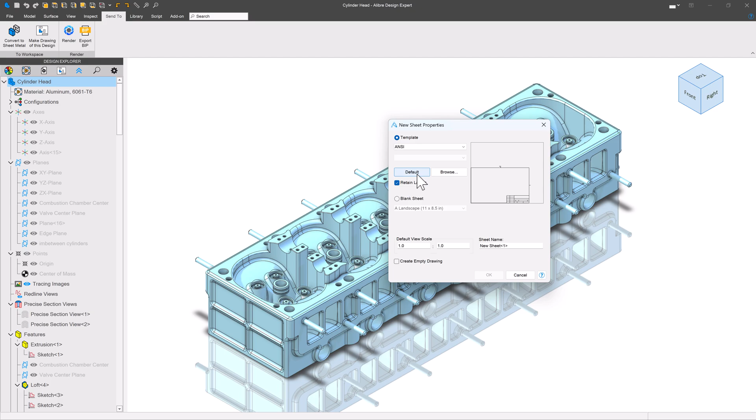Let's go. Here's my part in Alibre, and I would sure love to be able to show its weight on my drawing. So the first step is to make sure your part is saved and get this on a drawing. Choose whatever template you'd like. I'll go ahead and go with, say, ANSI size B. And I'll insert my views.

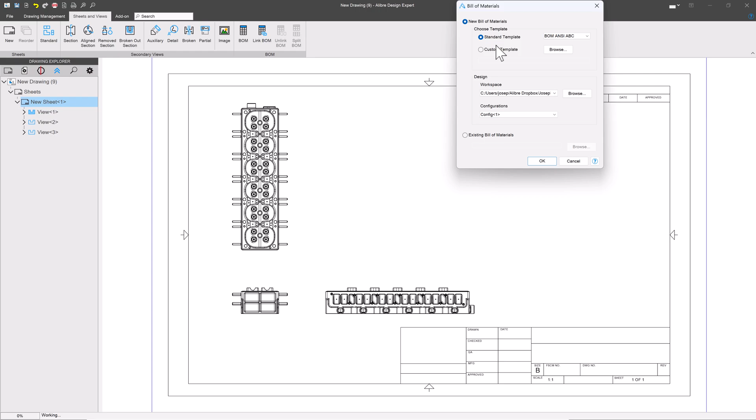Now from here, we have one individual single part. There's not really any reason to have a bill of materials. However, we can use the bill of materials for another reason. So I'll click on Bill of Materials, and then I'll choose a standard template, unless you have some custom template that you like. And from here, I'll double click on my Bill of Materials to edit, and I'll go with Add Column.

But instead of add column, I'm actually going to delete all of the columns that I have over here. Scroll to the bottom and add simply one column called weight. I'll click the plus sign to put weight in. And now my bill of materials is delivering my weight as 9.6 kilograms. So I can exit out of that, and I can stick my bill of materials wherever I would like for it to report weight. Now let's take a look at how this works.

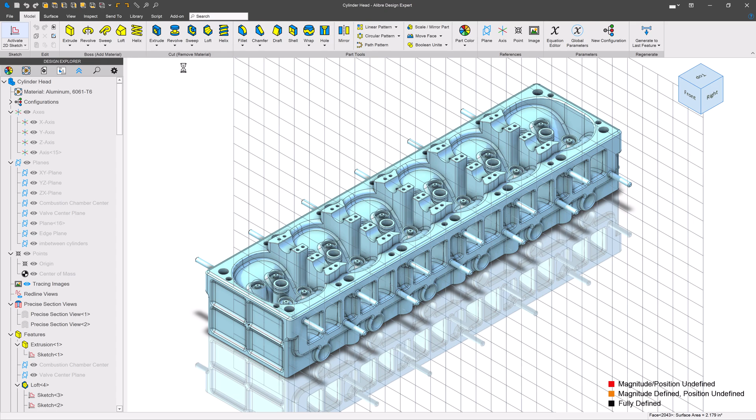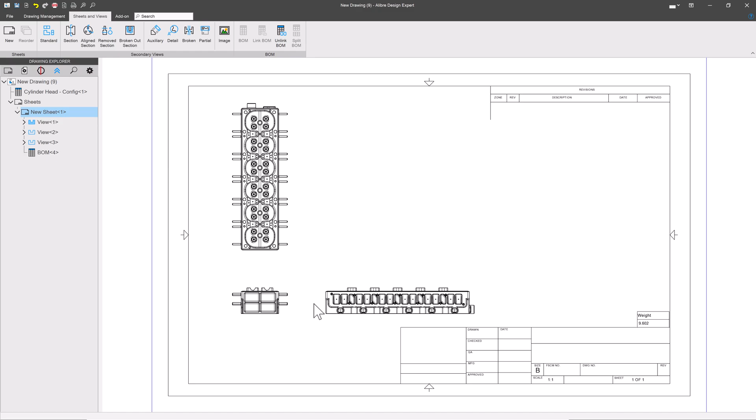I'll go ahead and edit my 3D model, and I'll add some weight by sketching out something to extrude on this face. I'll make a circle right on the origin here. We'll extrude. Now I'll head on back to my drawing. We'll save and close. And you'll see that this doesn't show up on my drawing, right? There's no extrude here, and the weight is still the same.

So we'll make sure that our drawing's up to date by reprojecting the views. And of course, I should save my drawing first. And once we're all saved, we'll reproject. There you can see the extrude that we just added in, and our weight is increased to 10.9 kilograms. So this is how we can get an updating drawing, exactly how we'd want with updating weight.

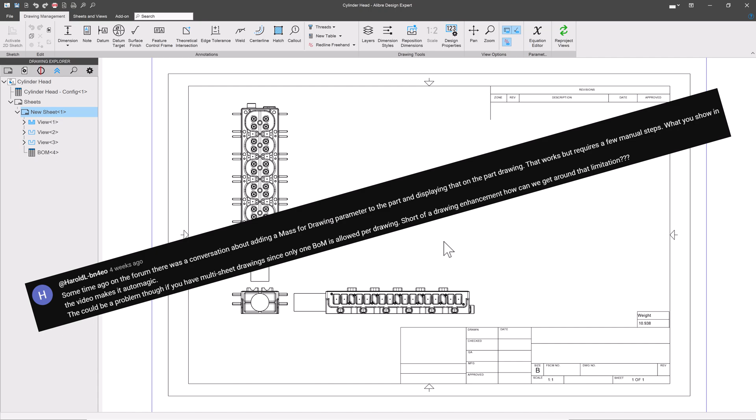But I received a few other questions. What can we do if we want to put weight that updates on multiple sheets? And what are some ways that we can handle an assembly? Well, let's talk about that by talking about another strategy to get weight on our drawings. First, I'm going to delete my views. There we are. And now I have basically a blank template.

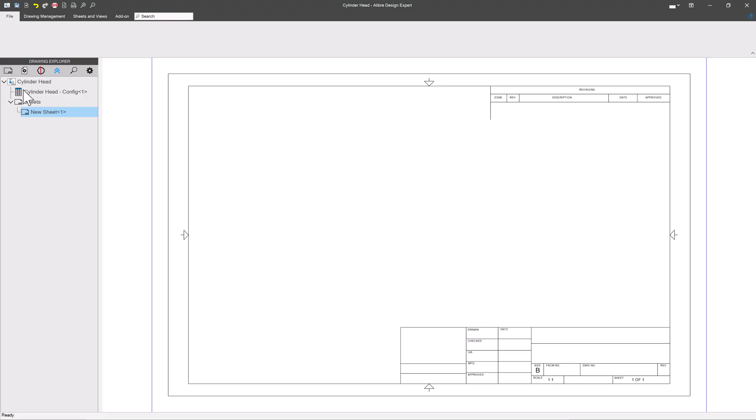And I want to save as such. So I'm going to do a save as. I'm going to save this so that I can use it as a template. So now I have this drawing template weight file set up, right? And I'm going to use this as a template. And I want to make a property. So I'm going to open up a blank part now. And we'll go to File and Manage Properties.

You see, I have a property called Mass for Drawing, exactly like this. So type this out exactly as it is, Mass for Drawing, and then click OK. And you'll have a custom property come up called Mass for Drawing, and it needs to be called exactly this.

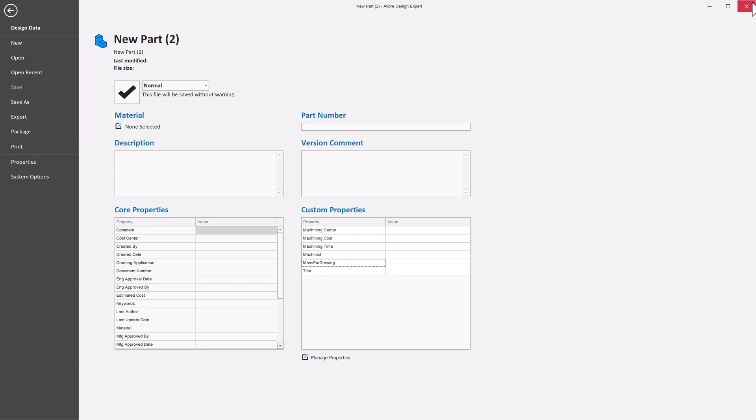So once Mass for Drawing is set up, we'll head back to our drawing here, and we'll go with starting a sketch on our sheet and inserting a field, a text field. And we want this field to have a property value, and for the value, we're going to have it be our Mass for Drawing right here under custom properties.

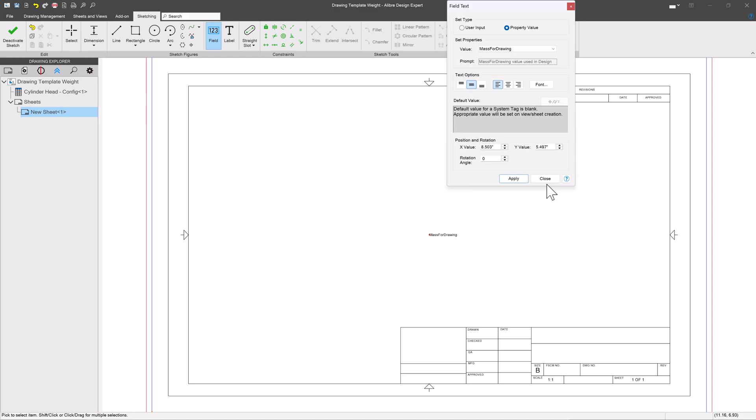Now ANSI templates don't explicitly mark this box, but it's mostly used for weight. So I'm going to put my weight right there in its little box. And I'm going to save my template. So I have this blank property that is called mass for drawing. And now we can go to a scripting solution.

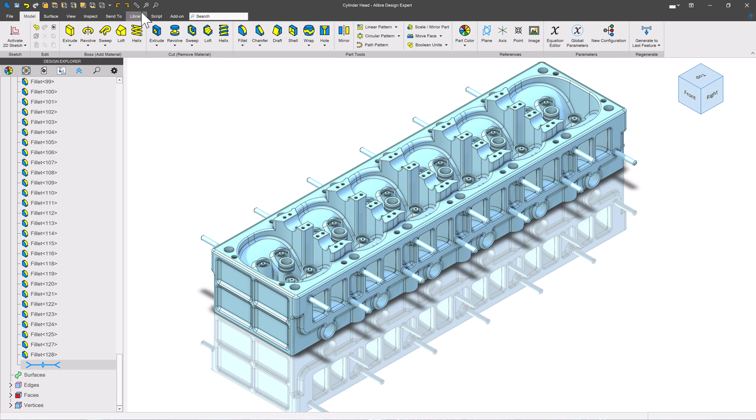So now that we're back to our part, we need a strategy to get a value into that custom property. And I think a script is the best way to go for pro and expert users. So we're going to go to script over here and launch our Python console. I'm going to go with new, and I can paste in a script. I'm going to put the script here in the description of this video so you can use it too. And I'll go ahead and run.

You'll see that we go to our console and our carets will show up here. So we're done running the script and it looks like there's no errors. So I'm going to go over to my file and I can see that mass for drawing is now populated with the mass of 9.6 kilograms like we've seen before.

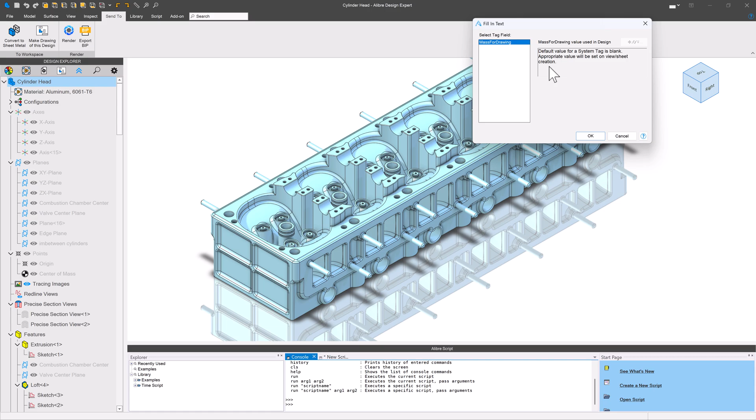So with that being said, let's go to save the part, send to, and we'll make a drawing. But this time we'll make sure that we browse and we pull up the template that we want. And that's the template that I saved it as, so I'm going to say OK. You can see that our mass for drawing is set to be automatically put in. So say OK to that. All right. Now we can see that down here our property has updated to 9.6 kilograms, exactly what we wanted.

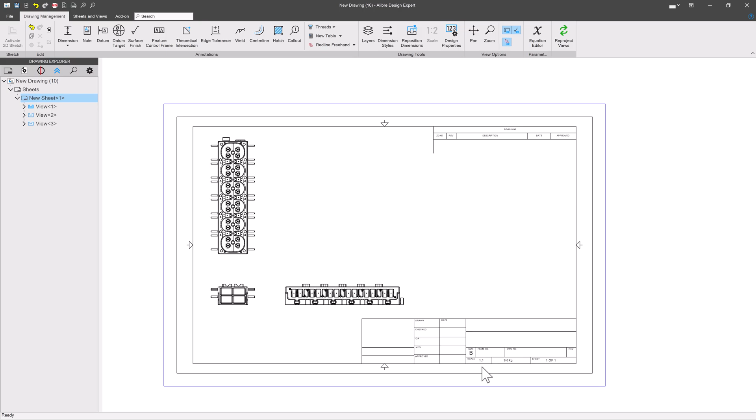So these are two ways that you can get a weight on your drawing. Now it is important to say that when a change is made, the script needs to be rerun so the correct property value gets added in. Now it can be a pain to try to paste that script into the console every single time. So let's make some changes here.

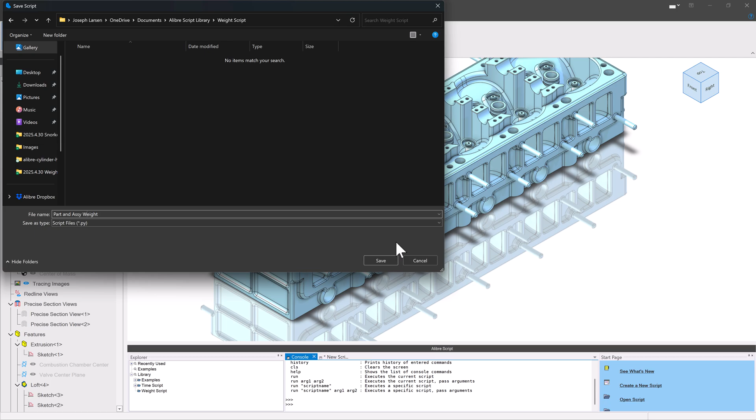Under Library, I can open Library in Windows Explorer, and there's my script library, right? So I'll go to Script and Save As, and it will save my new script with whatever I'd like. So I'll go ahead and enter in the path to my library, and then I'll make a new folder called Weight Script. Or you can organize your scripts however you see best. And I'll say part and assembly weight. And now I can see my weight script shows up. And I can just double click to add this.

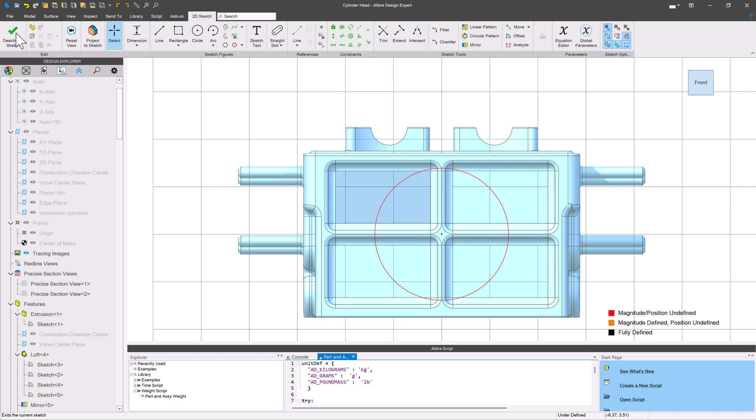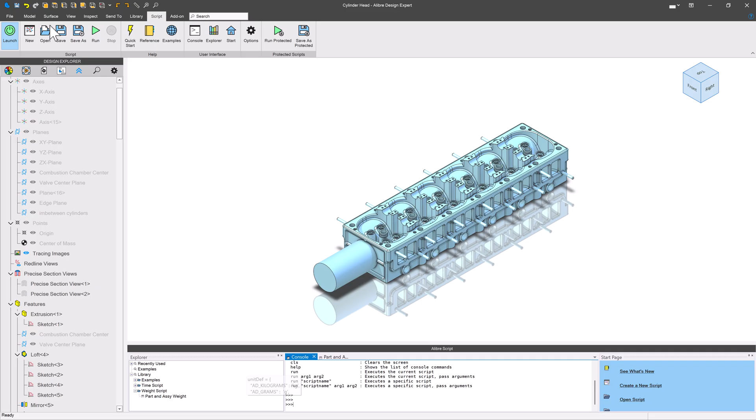So if I once again go to my model and create a sketch on my cylinder head's face. And so I'll add a circle right on the origin here. And once again, do an extrude just to change our weight. And then we'll go to our scripts and double click on part and assembly weight. And then we'll go up to here to scripts and make sure that we run it. So after running, we can see that we have 10.93 kilograms, which is our new weight.

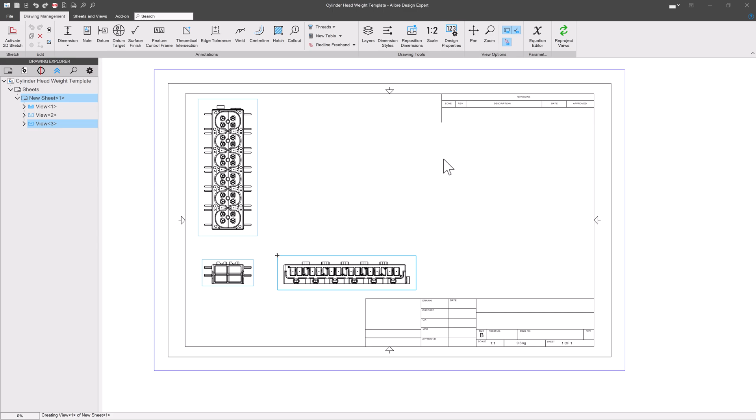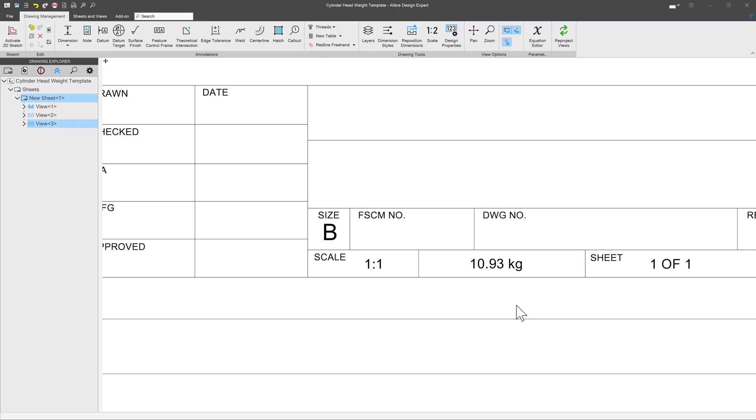I'll go ahead and save my changes. And now when I go ahead and update everything, apparently I have to save. I'll reproject my views now. And there's our 10.93 kilogram update. So we have updating weight, and of course you can make your subsequent title block sheets all have this weight, so you can have weight on every single one of your sheets, and it updates for parts, no problem.

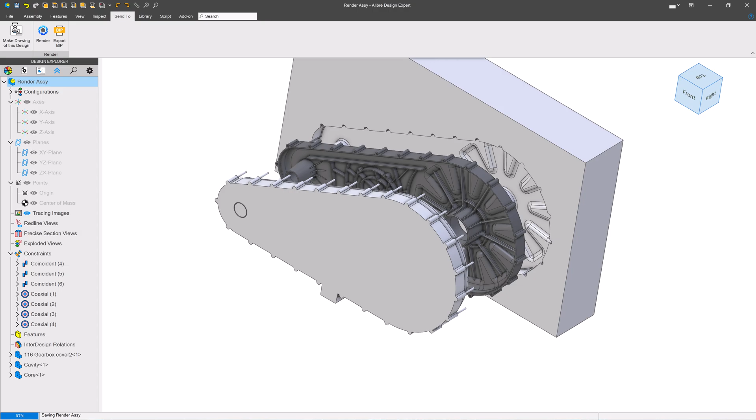But what about assemblies? Let's take a look at those. So here is an assembly, right? We want to send this to a drawing. This is for injection mold tooling, right? So our parts fit right in, and you can get injection molds that way. Let's send this to this drawing, and I'll go ahead and save it first because I moved those parts. And we're going to say, oh yeah, let's use that custom template.

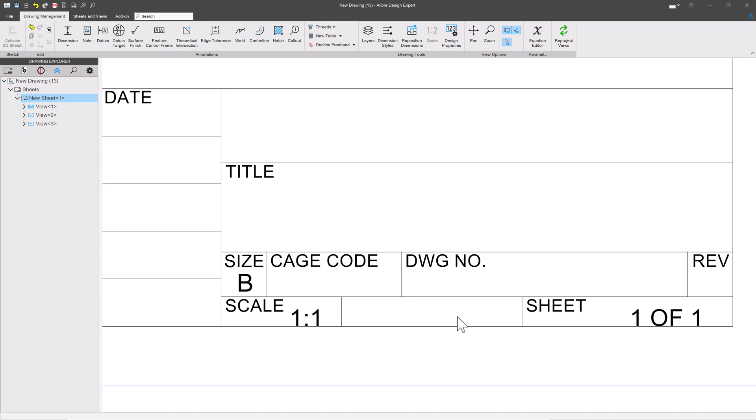Alright, here we go. And as you can see, we have no value down here because we haven't run our script yet. But let's say that we want to get our weights using our bill of materials. So let's go ahead and go with Sheets and Views, Bill of Materials, and I'm going to say OK to that. Because we're in an assembly, maybe I want to keep all my columns this time, and I'll add weight.

Once I close this, I can see that every component has its weight listed. Now there's one thing that we can do if we want the weight of our entire assembly. That's quick and easy, but I don't recommend it, and I'll show you why. First off, I can highlight this and say column, show summation row, and this adds up everything, right? So if I want to know the total quantity of parts that I am putting in my assembly, I can say column, show summation row, and it tells me I have a total assembly of 3 parts.

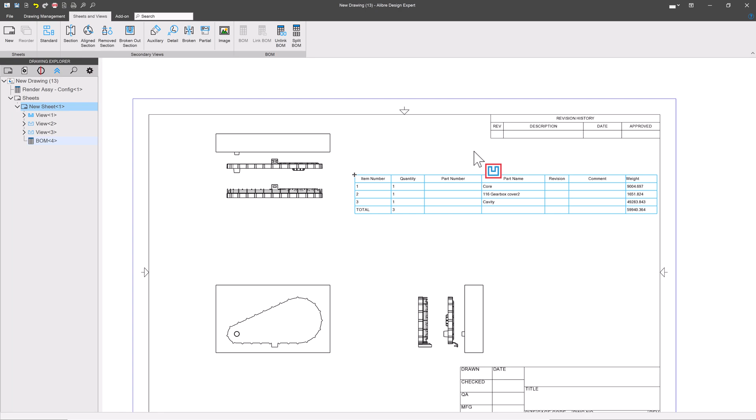The total weight is 59,940, right? Pretty heavy assembly, but I don't think I have material set, so it's probably unusually heavy. But this is why I would shy away from using the summation row for weight. This works great if your components are unique. But if I go and say edit my 3D model, and back in the assembly I duplicate this a few times, I hold Control and drag my mouse, I can get a lot more weight going on, right?

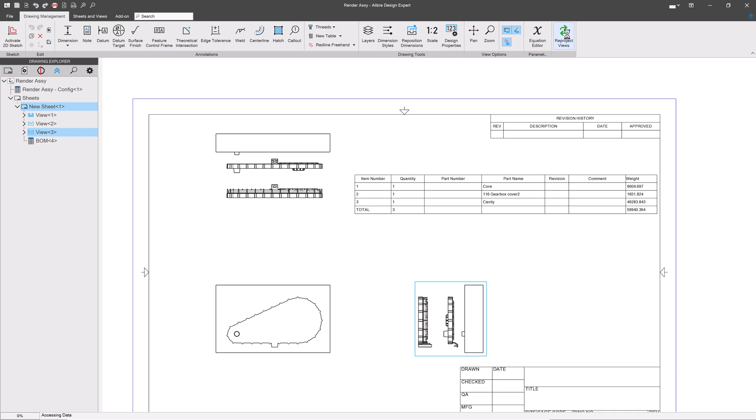So I'll save, and now I'll be sure to update everything. Now with this updated, you can see I have the same weight, and that's because the weight is not multiplied by the quantity here. So I would recommend using this script if you want a total weight, because if you have duplicate parts, it only counts the weight of one of those.

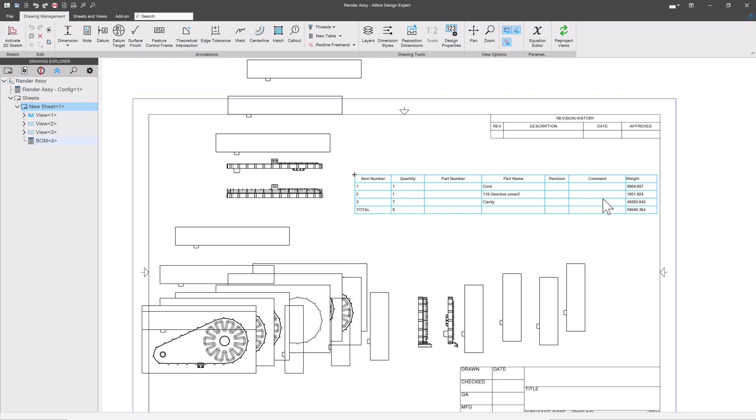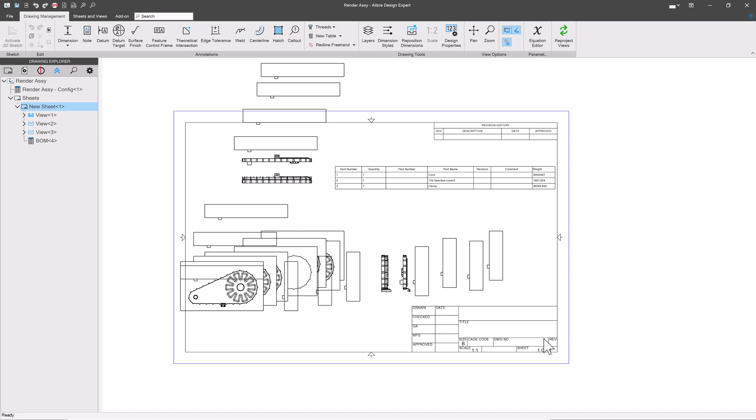So again, we can come over here and column and not show summation row, right? That just toggles off and then it goes away. And we're left with this mess of views that I kind of messed up by adding all these parts. But let's go run our script. So we're going to go edit our 3D model, and then we'll go to script.

We'll launch our script. Here's our part and assembly weight script. We'll click on run, and there our carets came in, so we're done running. Let's go see how much this weighs. Oh, and it looks like this is blank, right? So for assemblies, you might need to run this twice. Let's just check. Run. And there we are. Yes, 161,000 pounds.

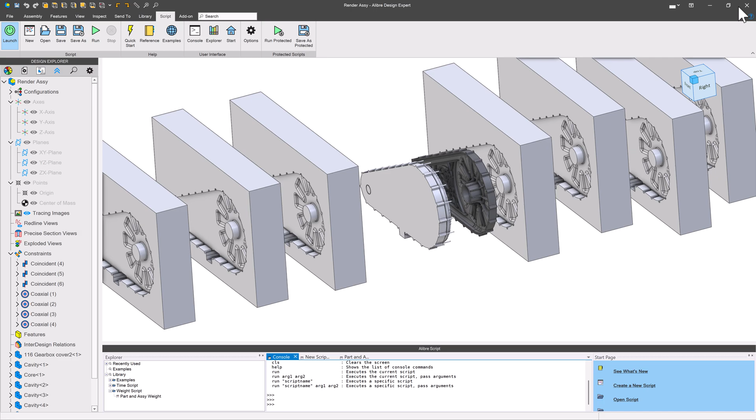This is why it's a great idea to assign weight and material types like we did with our part example that was in 6061. That was a realistic weight. So if you have an unrealistic weight, that is the first place to look. But now, if we head back to our drawing and save, we'll simply reproject our views. And now because we ran our script and our custom property has the value assigned, the value shows up here. So we are able to show our weight.

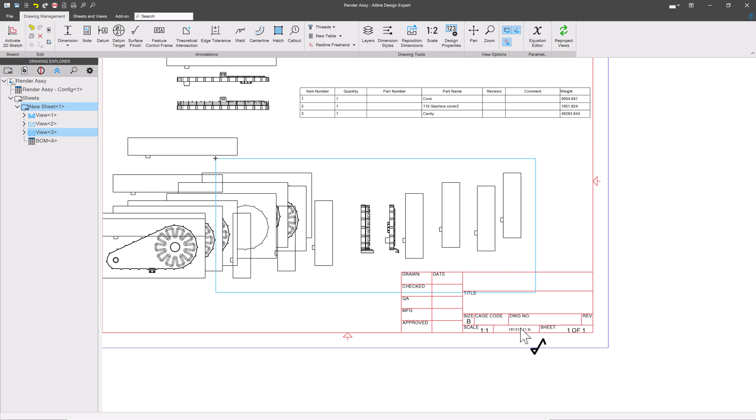Again, for the assembly, we can see the individual component weights here. We can see the total weight in our weight part of our drawing. So I think this is a great way to go if we want to show weights for assemblies and their individual components. Now in the last video, I think I have another way of doing it if this doesn't work for you for assemblies, but it's kind of a messy way of doing it, and I don't really recommend it, as I said in the last video, so keep that in mind. And that is how we do weight in drawings.